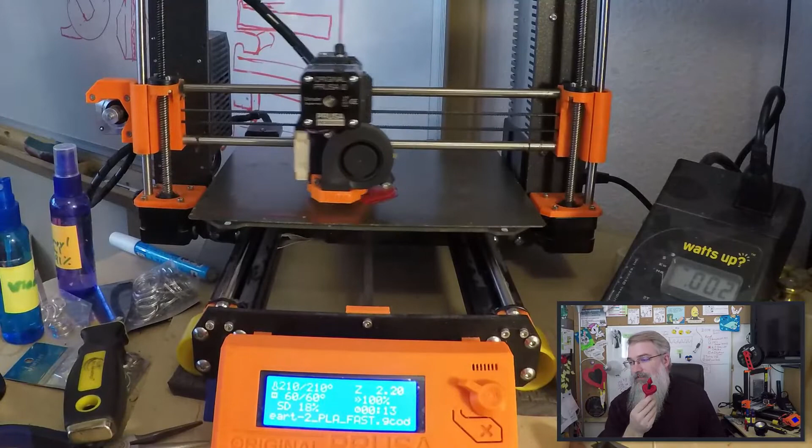But before I go into more details, I'd like to go over the numbers. So here's the numbers for this print. The heart, in this case, took 45 minutes to print, and the arrow took 1 hour and 20 minutes to print, including little stop times, for a total time of 2 hours and 5 minutes.

The heart took 0.007 cents worth of electricity, and the arrow took 0.012 cents worth of electricity, so total electricity is 0.019 cents. The weight of this is 0.012 kilograms, and at $20 per kilogram, that comes out to 24 cents. So this whole thing cost 26 cents to print, pretty cheap, nothing to it.

I don't mention this every video, but when I'm doing my power estimates, I base that on 10 cents per kilowatt hour, which is a good average here, like in Colorado and other places. But if you happen to spend 20 or 30 cents for electricity, it's easy enough to do the conversion, but just to let you know that. Also, electricity is such a minor part of this.

So anyway, it's pretty cool, pretty happy with it. I've had some issues though, so I'm going to go over those issues and explain what I've done. If anyone else is having issues with these, tell me, because I think maybe I need to do some more redesigns to make this better. But let's go to that now and talk about the issues.

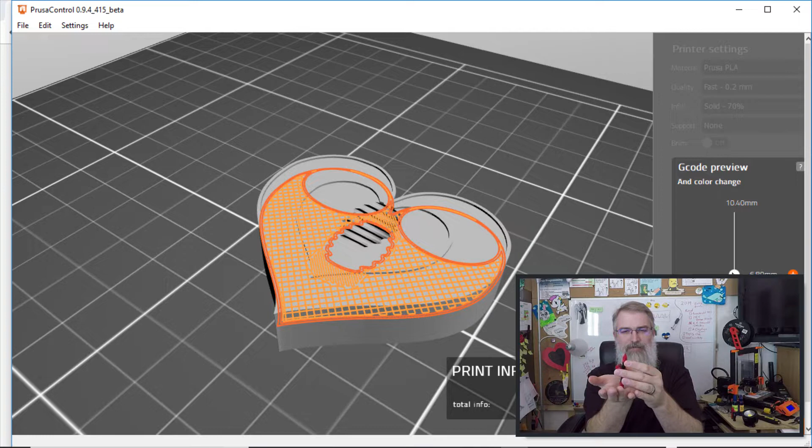One tiny thing before I go on the issues: if you print this out, you might notice there are actually voids in the top of the heart. What I was trying to do with that is balance it. I don't have it actually balanced perfectly, it's still kind of heavy on this side, so that you could, in theory, stand it up straight and not have it fall over. That's why there are these voids in there, which you can see right here in the slicer. So if you're asking what those are, it's trying to balance it.

Oh, and I forgot to do this. So for those, I forgot to put this in the last section. Here I'll put a video of me switching out the gear, but there is an issue with that with the grease, which I'll go over here in a second.

But here, watch this video. Because once it starts beeping, I'll swap it out. So I'm filming the swap out.

Okay, so at this point, I'll hit that to make it stop beeping. One thing to note is when you place this on your bed, place it far enough back so that you're not going to have any problem with this bar.

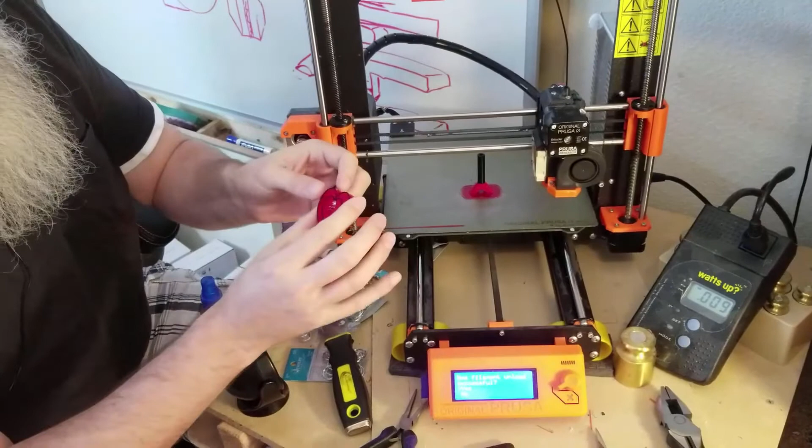So here I put a little tiny bit of white lightning grease in there. You don't have to, but I do. Then carefully try to get this on without breaking it off. Shouldn't be too much of an issue. Oh, almost got it. Oh, got it. I'm just holding the bottom down here so I don't break it. Go slow, I don't want to break it off.

And you got to make sure to get down far enough that the top of the heart is not going to hit the nozzle either.

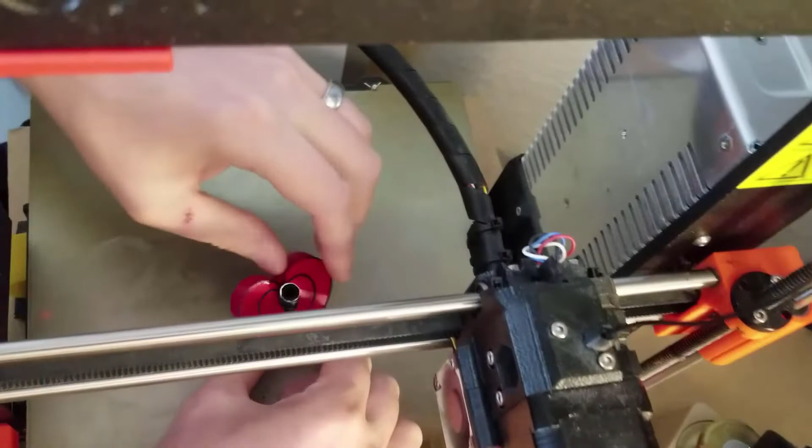Boom, there we go. So now I'll put this black back in because I still need to finish up some black.

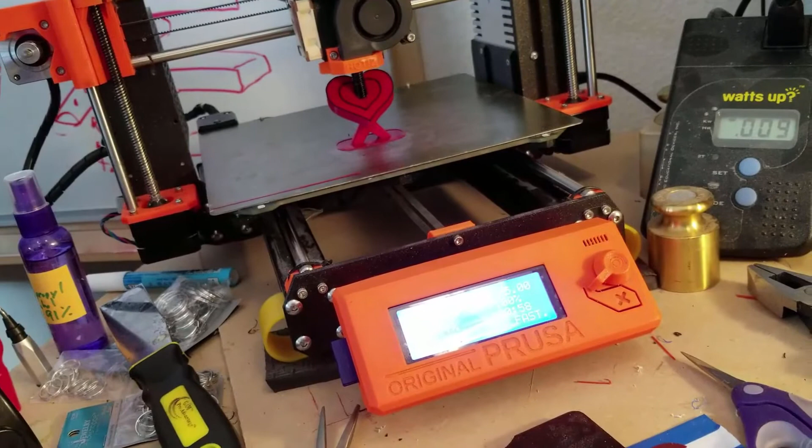Check that height there, looks good. Yep. And hopefully it'll start printing. Cool, more than high enough. So I got one more switch point here in a little bit, and then I'll go red for the tip of the arrow, and it'll be done.

Okay, so hopefully I pointed out the one thing that I think you should not do, it's obviously wrong: put grease on the gear before you put it on. What I did is I did a couple experiments, three of them here. One, I put heavy grease on there, put it on, wiped it off the top, and made sure there was one section that had some grease on it. I set this aside for this video two days ago, and I haven't touched it.

It's been in a box, and it's been rattling around a little bit as I've moved the box, but I haven't intentionally tried to break it. And it's already broken by itself. My thinking was I was going to try to snap it in this video, but it has already snapped. So don't put grease on beforehand.

I don't think the grease even affects the PLA, but I think what happened is I put the grease on there, it got on the top, and so as it tried to put new plastic down, the grease was in the way. It couldn't get good adhesion because of the grease. So don't do that. If you're going to grease it up, which I think is a good idea, grease it up after the fact. I don't think grease has any interaction with PLA, but definitely it doesn't adhere, so it broke.

And I got a couple other ones that I was breaking last week. Now I have two more experiments that I did. Let me make sure I keep them separate. And I have to apologize to somebody who was actually trying to print this, based on my own stuff. Let me get his name. Gene458, who tried to print this out.

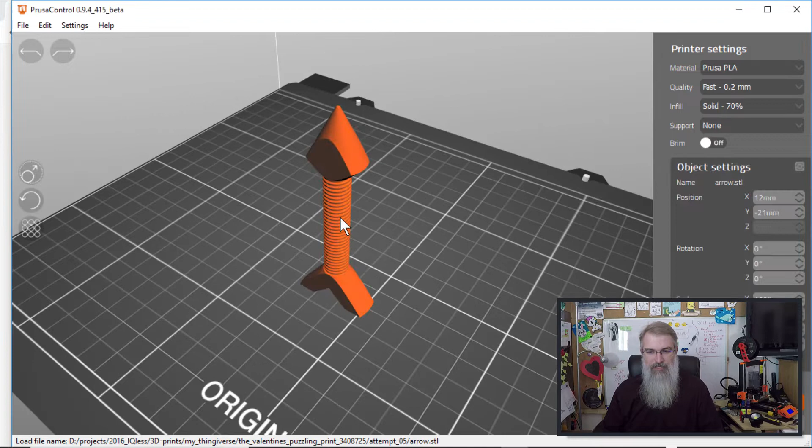So this is the one that has a cylinder in the cylinder. If I generate this at 20%, you get up here, and what it does is there's that empty cylinder in the middle, so you're almost getting a solid piece there. That was my goal, I kind of fooled it into doing the right thing, and that's what this one is.

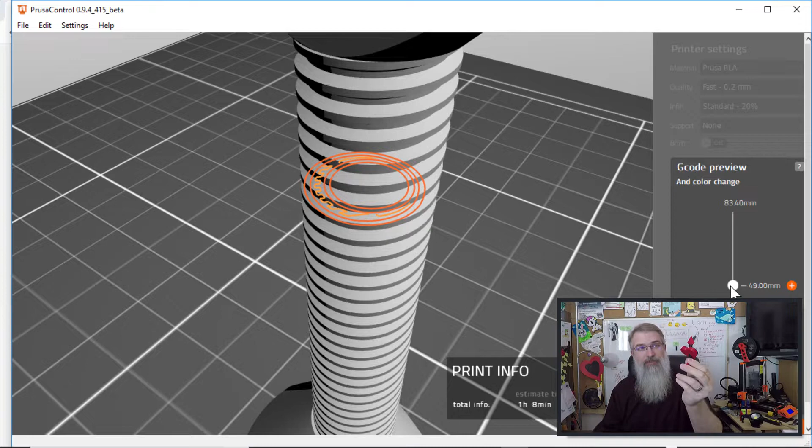And this one, I have no grease on it at all, and I have this, which I think should make it stronger than otherwise, but I wonder if I can - some people are having problems with this breaking. Let me see if I can... okay, I'm not having problems with it breaking. Oh, okay. But again, everyone has different printers and different slicers.

So I'm Prusa exclusively right now, and I probably say that because they do a good job, and I'm exclusively using the Prusa control with no special settings. I mean, if I forced it, I could probably break it, but it feels fine. But they were having problems caused by this somehow.

So I apologize, I should have put up a solid one too. So I did put up a solid one. In here there's two different arrows: one that has this shell in the middle and this empty space, and one that is just solid, so you can adjust it yourself. And this one is, oh yeah, that's stronger.

I printed this one out at 70% infill. Oh yeah, I think they're both fine. Which I probably would have done. I think the problem is the grease. So I think this at a 20% infill with the empty void works just fine, or if you can do the solid one, 70% infill to get it nice and strong.

Yeah, all right, I think that's the way to go. Okay, so that was the problem I had, and I was wondering if I was going to be able to break one here on camera. And I'm not, they both feel fine.

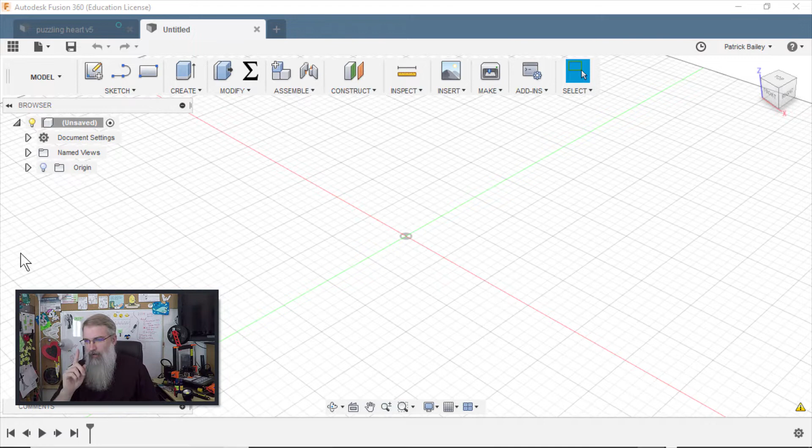Okay, so let me go over what I did roughly to get this arrow and heart working. One thing I like to show every so often is in Fusion 360, if you haven't done this already and you're doing 3D printing, you want to change your preferences so your Z-axis is up, I believe. Now that I said that, I'm going to be wrong. Yeah, Z-axis up, which is not the default, but if you set that as the default, then you don't have to change the orientation when you make your STL file.

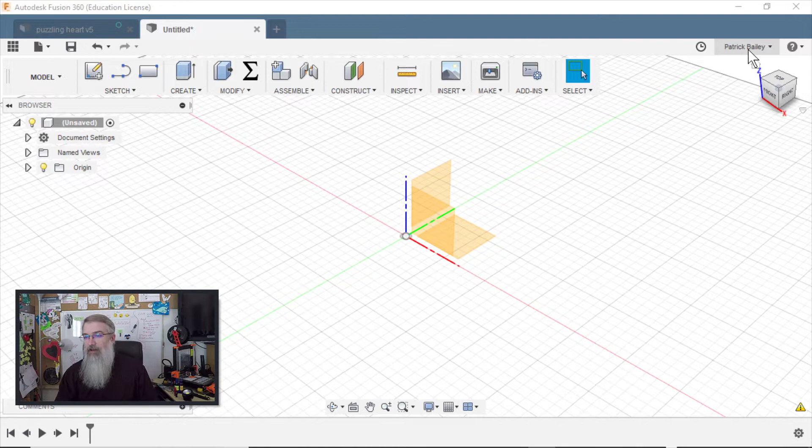To change that, you go up here to your name, go to Preferences, and go to Default Modeling Orientation, Z up, that's what you want. You select that, you hit OK. You may have to restart Fusion 360 to have that applied, but I don't think you do. It's been a while since I've done it. But anyway, let's get started.

So I'll right-click on here and say New Component, and we'll do the arrow. Not that there's anything really all that special about this - well, I recently did a video on the puzzling print, and if you watch that video on how I made the bolt, this is going to be pretty similar. But there's a few things I figured out on how to make the arrow part, the fletching - is that the right word? Which may be interesting or may not. Come up with your own idea.

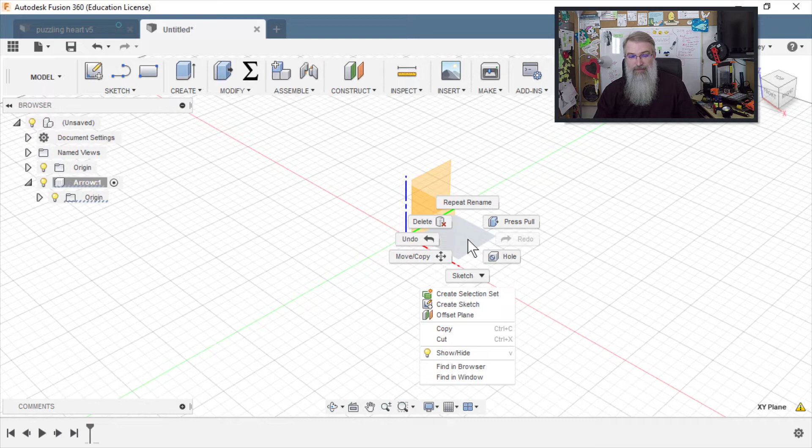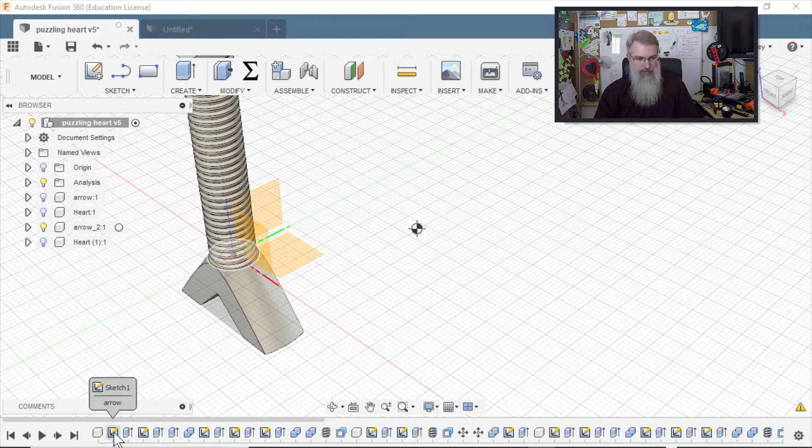So here I'm going to, let's see, right-click on this. What do I want to do? So I'll right-click on this and say create a sketch. Hit S, and I'll make, I think, 10 millimeters. What did I do for this guy, 10 millimeters? I think I did 10 millimeters, let me go check. Let's see, let me go check my sketch. Yeah, 10 millimeters, so do 10 millimeters, and that's going to be our shaft.

I'll hit Q for press pull, and I'll pull it up. Yeah, I'll just make it 40 millimeters for now, and so we'll just leave that as our shaft. Then from here we'll build the base and the bottom. So here, let's see, what did I do? It's been a while.

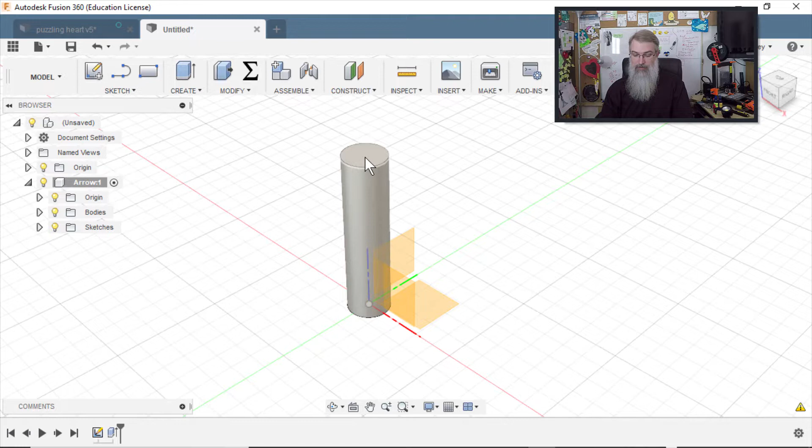I went out and I sliced it, didn't I? Yeah, what did I do? It's been a while. The nice thing in here is you can see your history, so if I go back in my history... oh, history marker here, there we go.

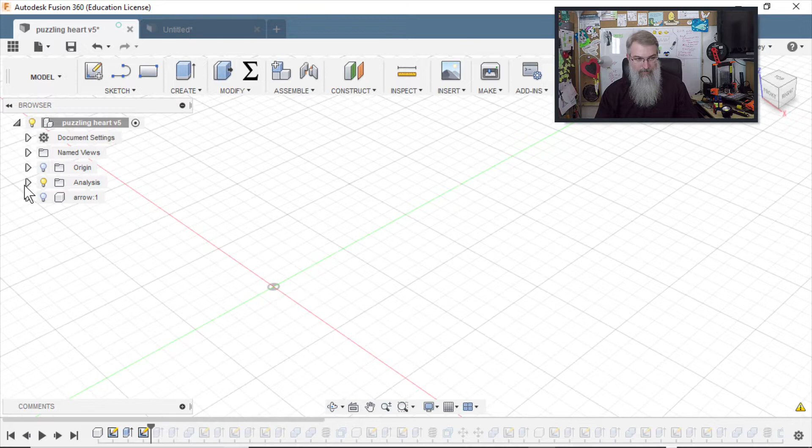There's my shaft. There we go. Lower guy, there's what I did. So I'll do the lower one first. I did a square and did that.

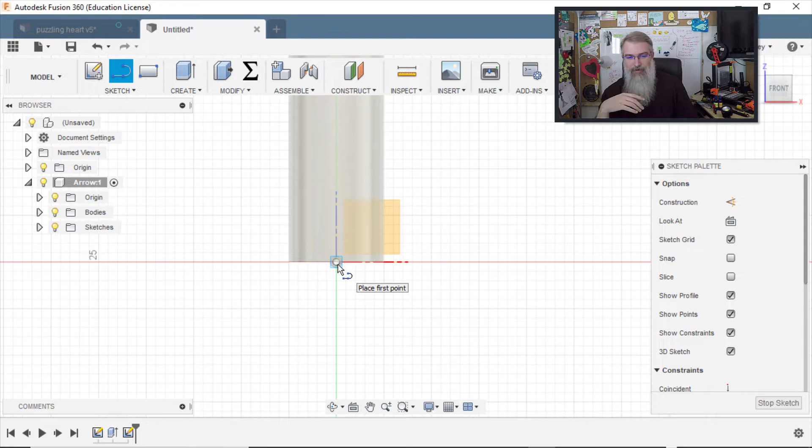So to get the bottom part, right click on here, create a sketch. And I'll make the... hopefully I'm not using the wrong word, I think it's fletching. I'll hit L for my line key, and I'll start here. I know this bottom is 10 millimeters in diameter, so I'll click here and go out straight, go 5.

Oh sorry, oops, I did something. There we go. L for the line key, go out 5, hit enter. L key, go the other way, 5, hit enter. And I'll make a rough base shape, like that.

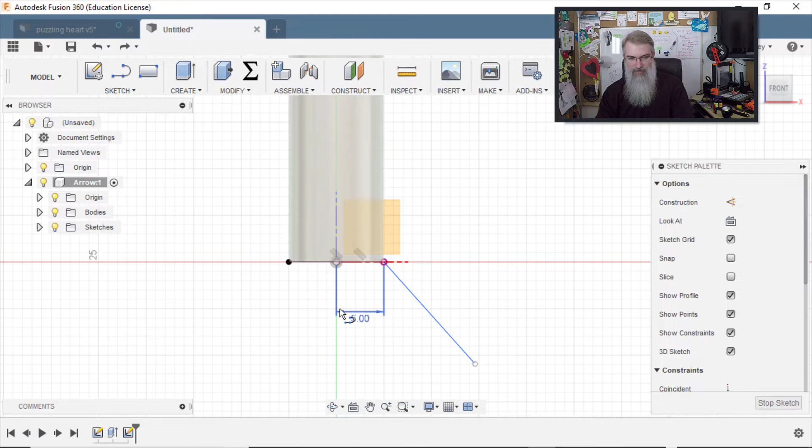I think I was doing 45 degrees, but let me do 45 degrees again. So I'll come down here, hit tab, type in 45 degrees, which forces that 45 degree angle, and then I'll go right there. And I'll hit the line key.

I'll just go straight across, hit escape, and I'll make this a construction line so I can use it later. Hit L, click here, and then go to my tab. And so I can actually do math here because I know this should be 90 plus 45. I can say 90 plus 45 degrees, hit tab, and then go down here, touch, there we go, bam.

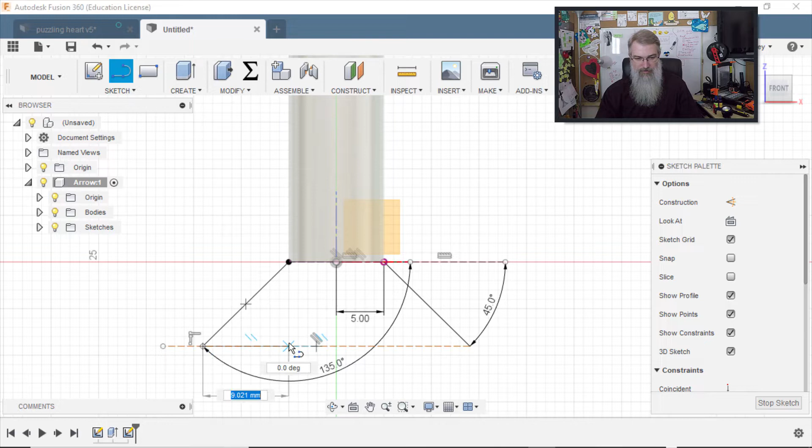And then come under here, let me see, we'll go 6. And I should probably do more than 6, that's not good. Wait, we'll do 9, and then we'll do 45 degrees again to the center.

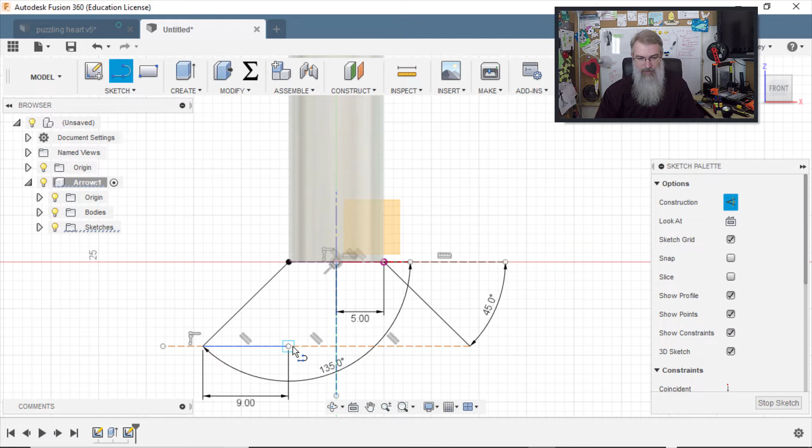Oh, I should put a construction line in there. Hit L, go down, escape, construction line, there we go. 45 degrees.

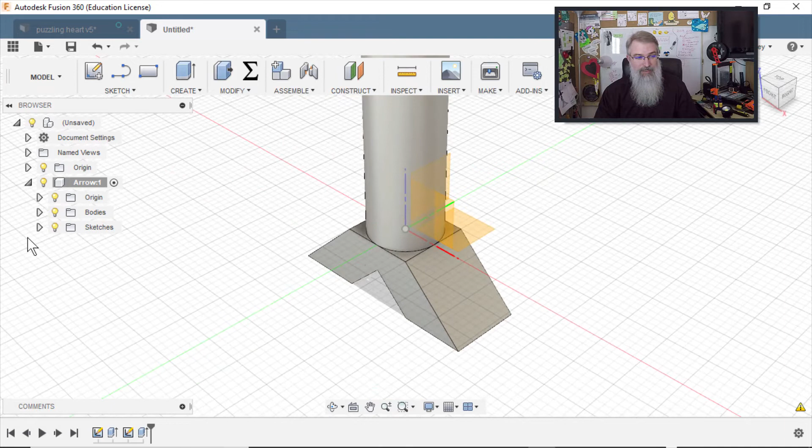And then what I can do is I got this little conic shape to make it a little bit less goofy, and I think I had to fiddle with this a bit. So I can say remove those bodies, add the sketches back, select that one, hit Q for my press pull tool, and pull it down.

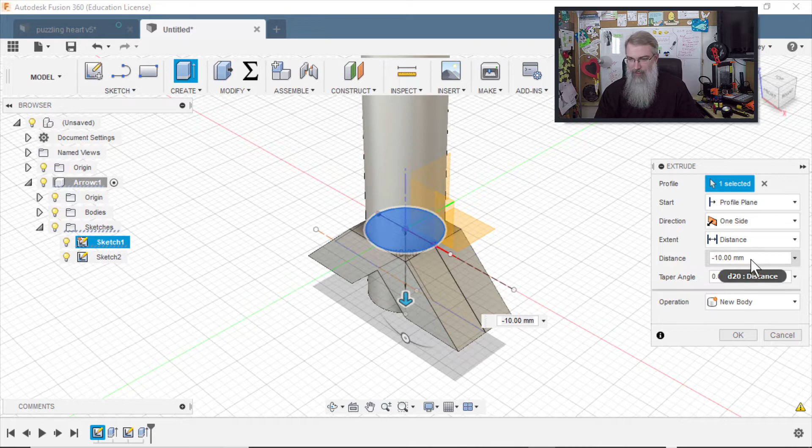Let me bring the bodies back so I can see it. We'll say new body, make sure it's a new body for what this little technique. And I want it to taper out. So I'll say, I think I adjusted this a little bit, 46. I think I adjusted it to kind of try to get close to the edges there. That'll work well enough for today.

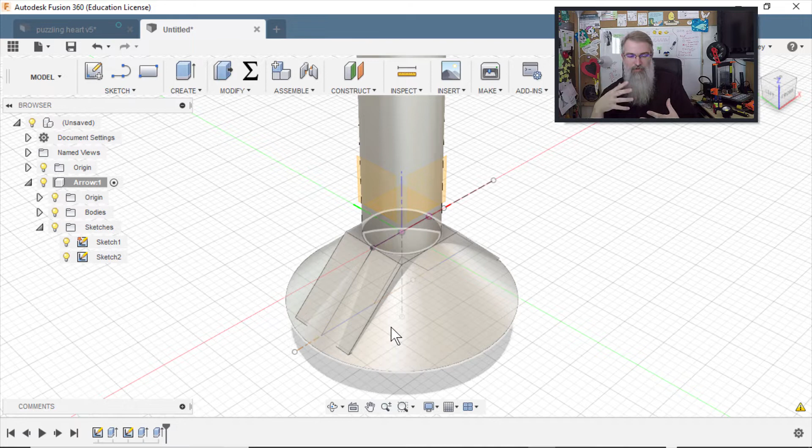Hit OK. And so now I can do some mathematical properties, some joining, subtraction of these two different objects. So I can go to, I think it's modify combine, which might sound funny when you say combine, because combine you can also subtract. There's the mathematical concept of tweaking them.

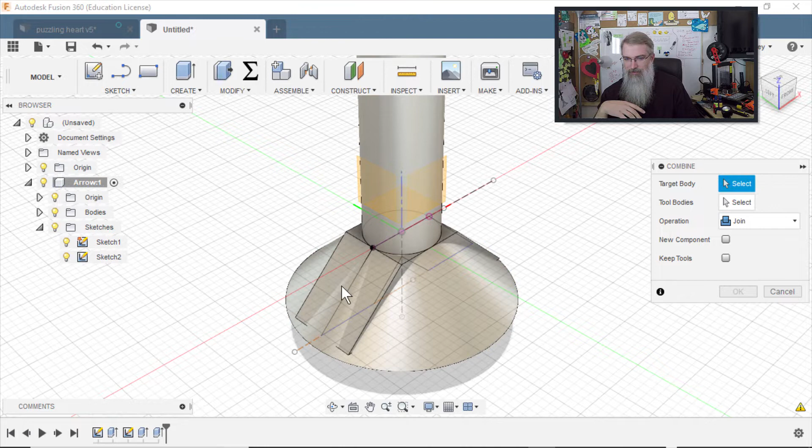So we select, let me start this over again. Select one of the bodies, select that one, and this one we'll select that guy. When I made that bottom one, I shouldn't have joined it. I think it's joined, let me double check on that. But I think this will still technically work, I think.

And so now I want to do an intersect. Yeah, okay, that's the problem. That's why I wanted that one to be separate, because now that I'm intersecting them, it's going to wipe out that shaft, but I can remake it here. So hit OK. And you can see it's not quite perfect what I did, but that was the idea. I tweaked it a bunch to kind of get it smooth.

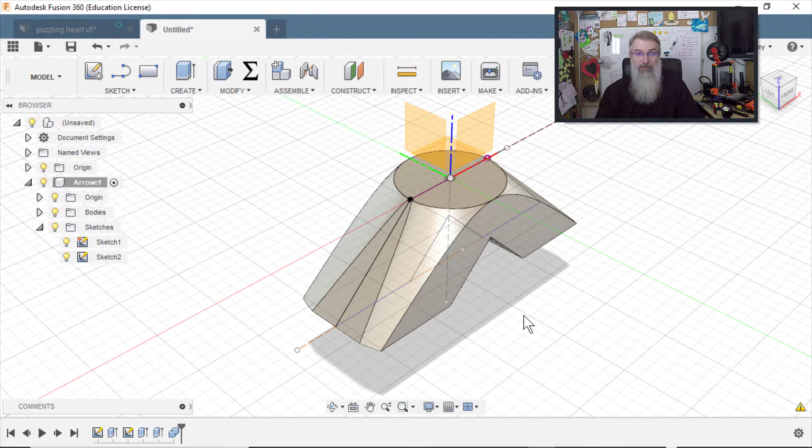You may have to fiddle with those angles. But let me come back here, press pull tool again. And say, what was it, 50? Boom, something like that. Now what did I do on the top? I did out and in. Let me see what I did.

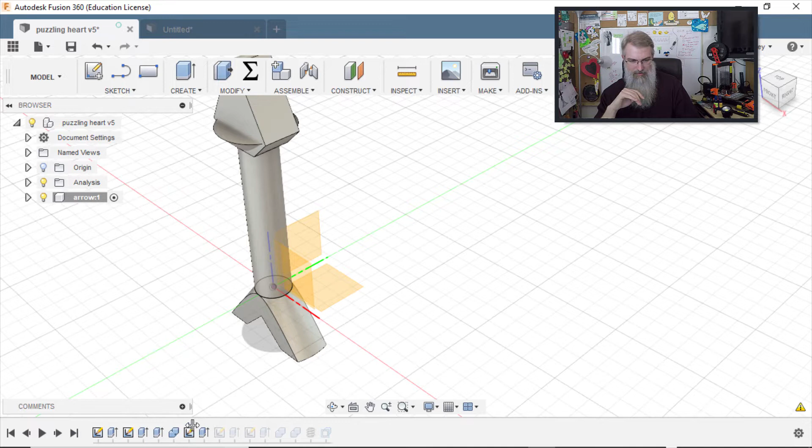There we go. Out. And then back in. And I did that. That's what I did.

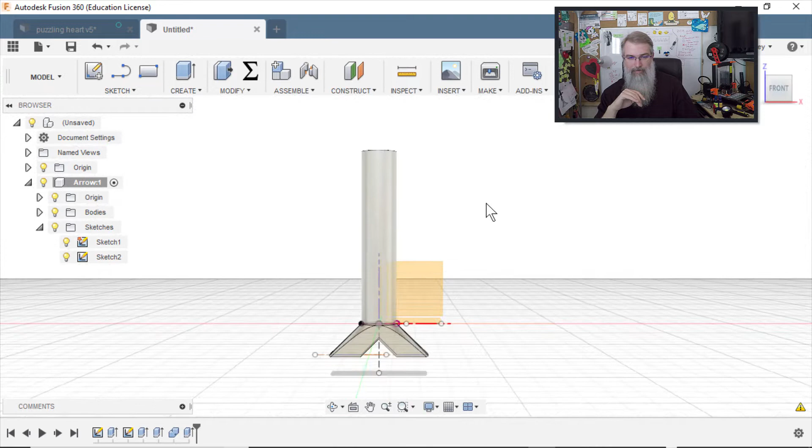Okay, so what I did here on the top is I clicked on here, pressed Q for my press pull tool. Oh no, if you do this and pull it, it's just going to extend your shaft and keep it the same object. I don't want that.

So I'll click on this and say create a sketch, and select that same spot, press Q, and so now it separates them.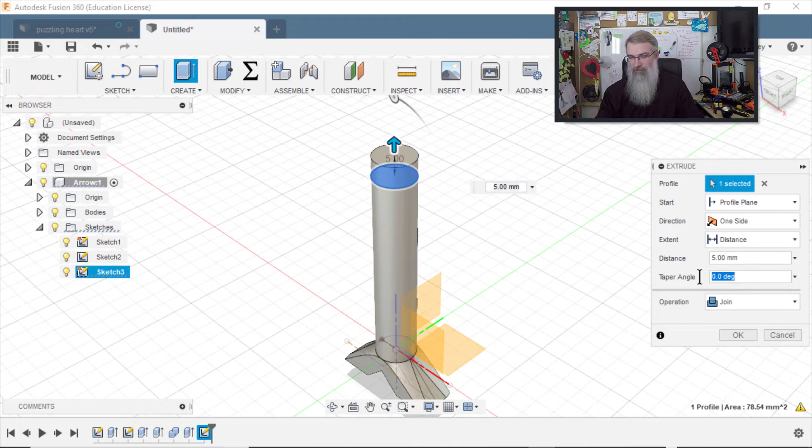And at this point, I want to taper out, and I can taper out at 45 degrees. I'll say, I forget what I did, I'll just say 5 millimeters for now.

I'll click on this, say create a sketch here, do press pull on this as well, and make this, but I want to taper it in, and I forget what I did, but it wasn't 45 degrees because I don't have to. We'll just say that, and I'll go as high as I can until I get a point. Hit OK, and so now I have that.

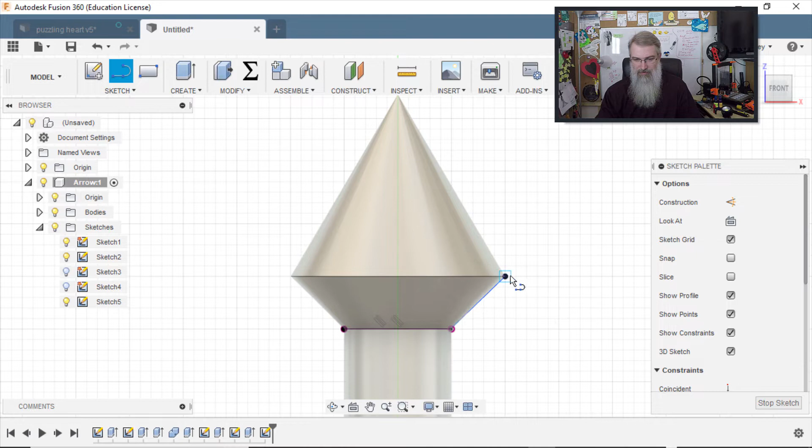So then what I did is click here and say create a sketch on here, and I'll make some lines. Line, line, line, and here I didn't want a tight point up here, so I got it.

Oh no, now I went to the top. Go to the top. And you can fix it after the fact.

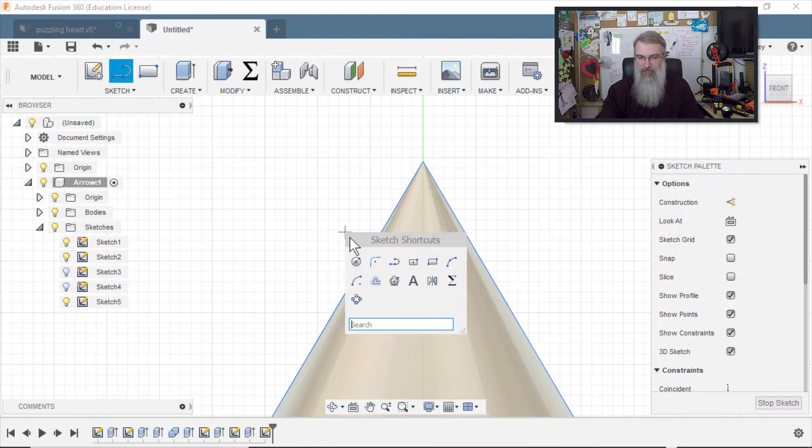So there's that shape. But I don't want a pointy edge, so I will put a little arc in there, because who wants to poke themselves in the face?

Boom. Okay, then I'll get rid of the bodies for a second. I've got escape. Do the bodies for a second. Click on this. Press Q for the press pull tool.

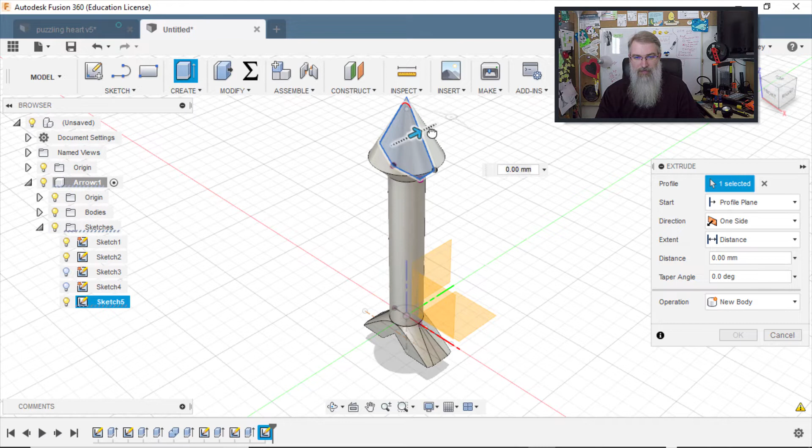Bring the bodies back, and again I'll do symmetry, 5 millimeters, and new body. So I have that, and now I can subtract these. So we've got 3 bodies.

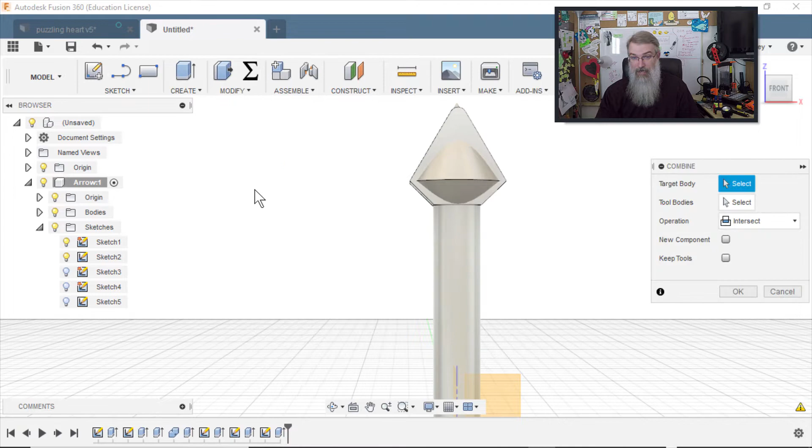So what I first want to do is say create, modify, combine. No, not that guy. Not those guys. Are you going to combine those two?

Okay, I just got the same problem I did again. Those weren't new bodies that were separate, were they? I have to recreate the shaft yet again. But there, I wanted to intersect those two. If I recall correctly, I think I originally created those as 2 bodies, and I had to combine them, and then I had to do this intersection.

So there is kind of roughly what I did, but now I got to bring back my shaft again, don't I? Oh, and it wiped out the bottom. Never mind, let's not do that. Let me go back in my history.

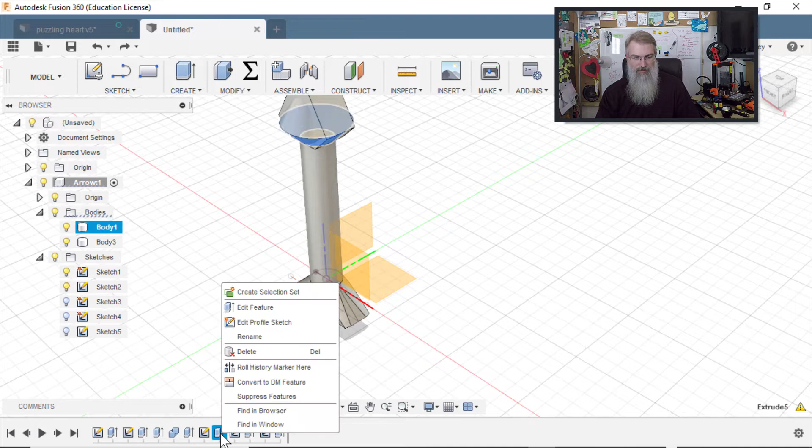Edit that feature. See, join, not a join. New body. I want it to be separate. And this one, edit feature, not a join, new body. There we go. And then this one,

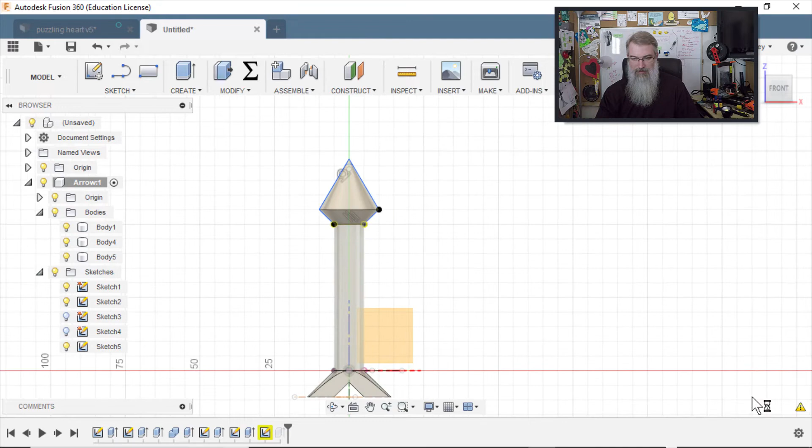and now it's being persnickety at me, but I think it's okay. Okay, now they're new bodies. I think that'll work. Combine that one

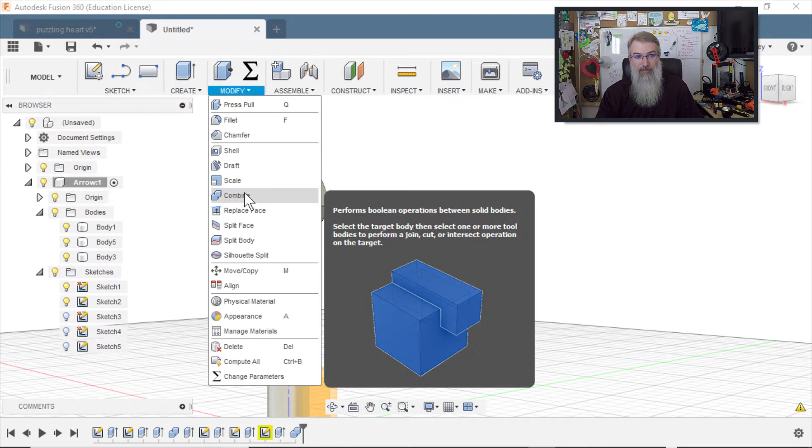and no, we want to join them. So join those 2 together, and then combine that one and intersect. There we go.

Now, of course, you'd want to probably tweak that a little bit to get the right fit. That's not exactly looking like what I did, but that was the idea.

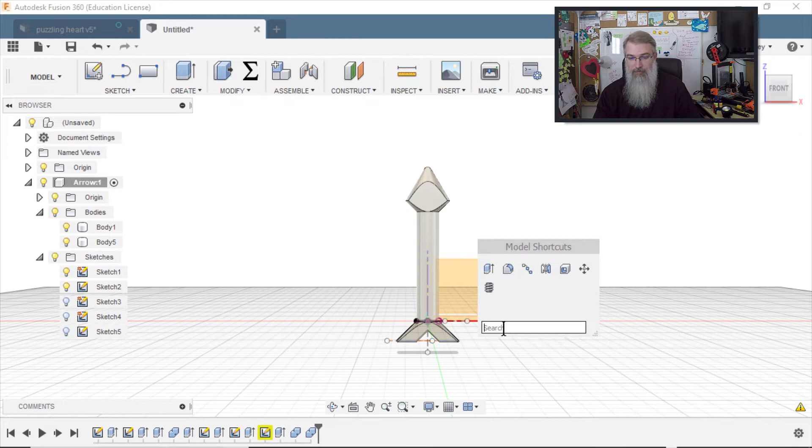And then lastly, all you got to do is put the gears on, put the threads on. So there's a thread tool. You can search for it, open up this tool and search for thread. I happen to be using it a lot, so I have it in my shortcuts.

And then we will select that shaft. Select modeled, because right now it's just a picture. And it will model for us, and it tries to attempt to figure out what you want. So it does an M10 by 1.5, which is good. We just want to make sure that we make the other one use M10 1.5 as well.

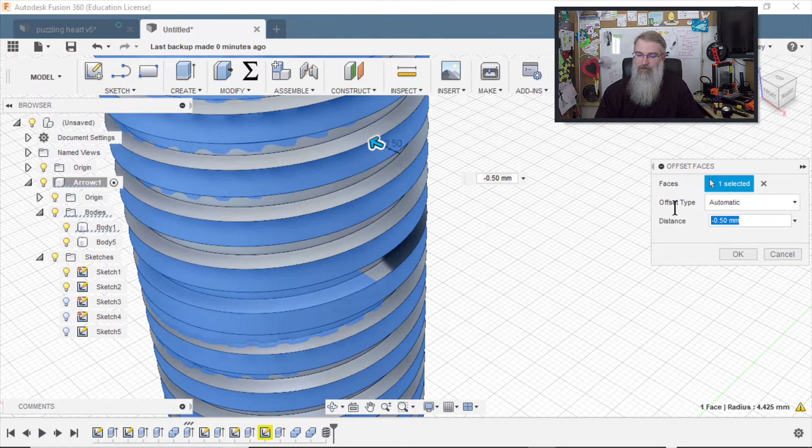So hit OK. And the last thing I do is hit Q for the press pull. Well, sorry, don't hit Q. Go in here, select the screw, select that plane right there, press Q, and I go in, not 0.5, I go in negative, I guess I'll type it, negative 0.2. And that makes a little looser fit.

Did you do negative 0.2? Yeah, negative 0.2. That makes the thread a little bit easier to thread on, otherwise it's too tight for what I'm doing. Your mileage may vary.

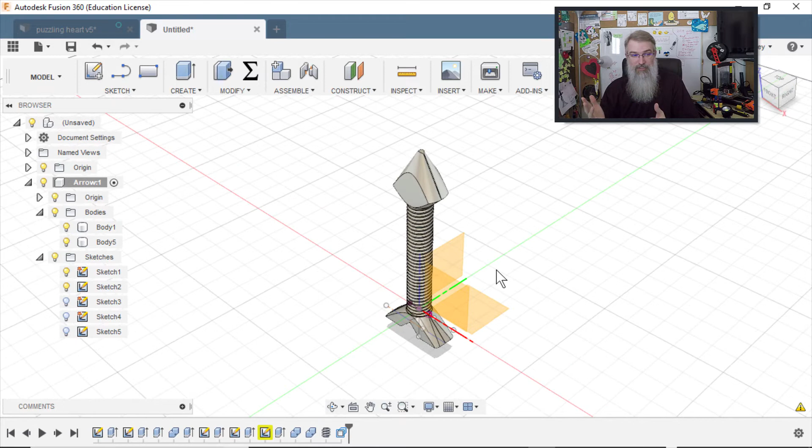So there's the arrow. This section's been going long, so let me cut it out here so I can edit the next part. So the next part, let me go over making the heart, the nut for this.

Okay, now that we have that, let's make the heart. So I'll right click on this and say new component, and I'll call this the heart. And I'll get rid of that arrow so I don't have to see it.

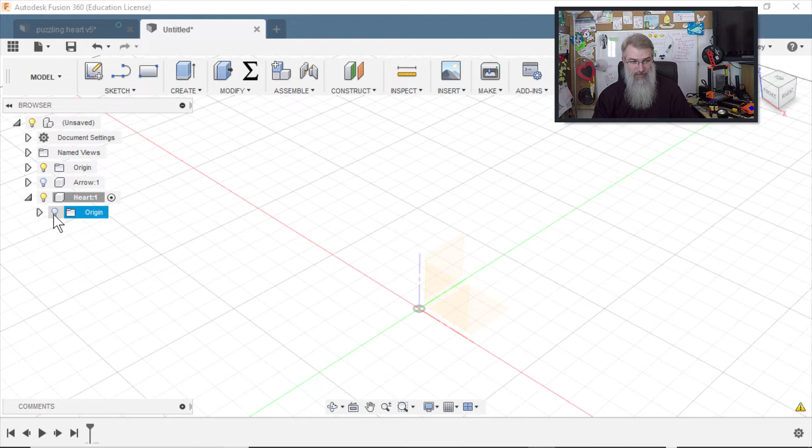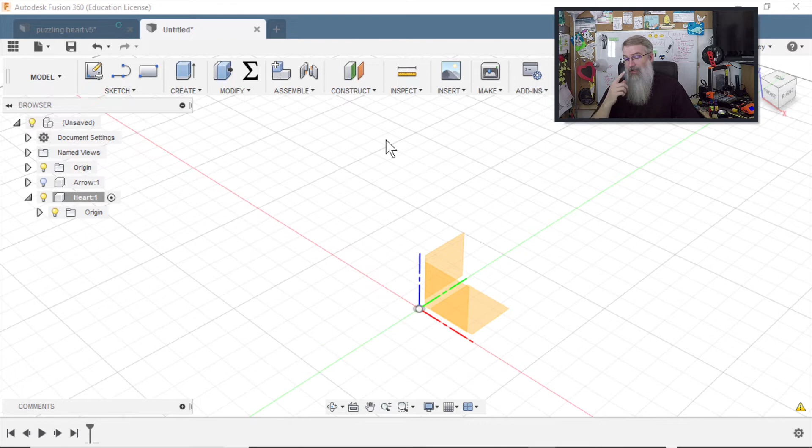Now, originally what I thought I was going to do was make the heart, make a shaft, apply a thread to it, and then move that shaft over and kind of cut through the heart, and then modify those both objects using the combine. I thought that would work, but it was such a complex shape that it didn't like me. So let me see what I can do here. Let me see if I can get that to fail again, and then go through the method I use.

So here I'll create a sketch, and I will insert an SVG. I happen to go find a heart SVG. It's made my life a little simpler than trying to draw a heart.

Okay, where are you? 3D prints. So there it is. There's a heart I found.

Oh, I'm going to make this too big, aren't I? Before I put in there, I kind of want to make a rough sketch so I get the right size. Let me get a rectangle and make it 50 by 50. I think that's roughly what I did.

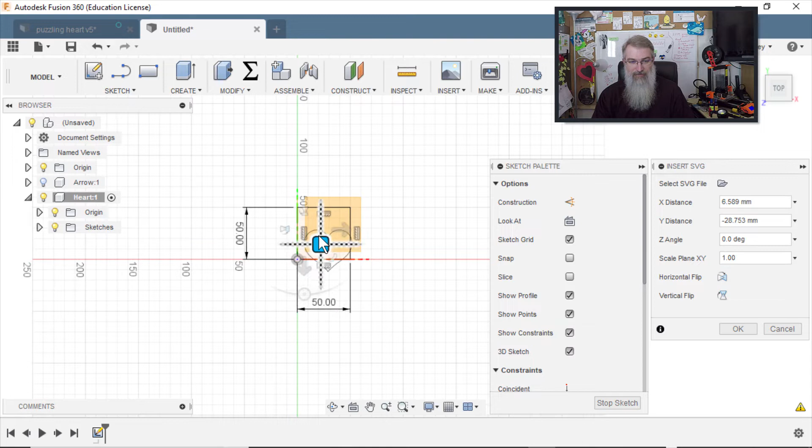Now we insert an SVG. There we go. So now I can kind of resize it to make sure it fits in there in the dimensions I want. I'm going to wipe out this rectangle in a second, but okay, so that's roughly the size I want. Hit OK. And then I can get rid of these lines because I don't need them anymore.

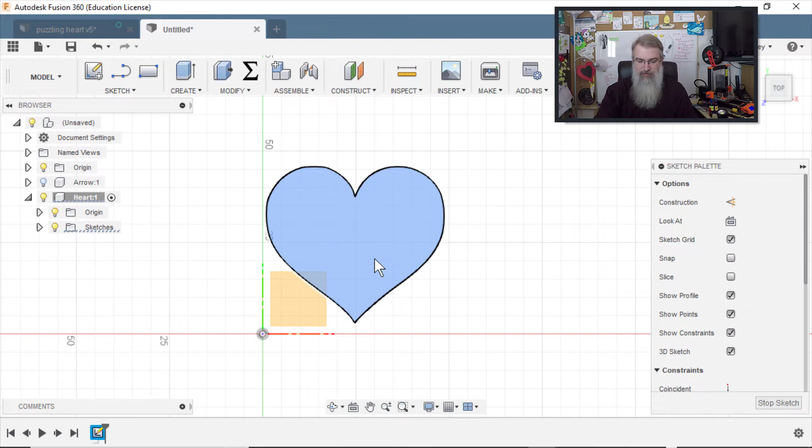And then I can take this and do Q for press pull and pull it up. Let's just pull it up 10 millimeters. And so there's our heart. We just need to put a thread through it.

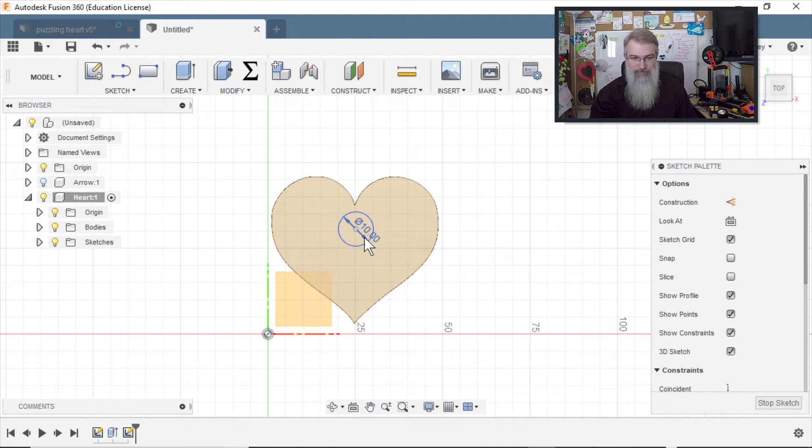So the first idea I had, and I'll go through this like I said, I will create a sketch on here and put in that 10 millimeter circle. And I'll click on this, press Q, and just to overdo it, I'll say new body, symmetric. We'll just make it obnoxious, way too long. You hit OK, it's a new body.

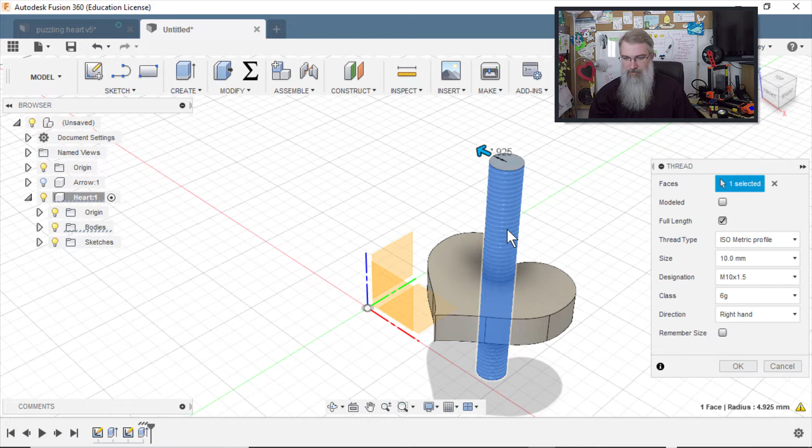Let me apply a thread to it. Modeled, and we'll see that's the right thread, M10 by 1.5. And come down here, press Q, and go in 0.2 and hit OK.

Because I could have just put a hole in there and gone straight, but I want to angle it, right? So what I would do next, or what I attempted to do next, was choose the Move Copy tool, click on this, and change it, 45 degrees.

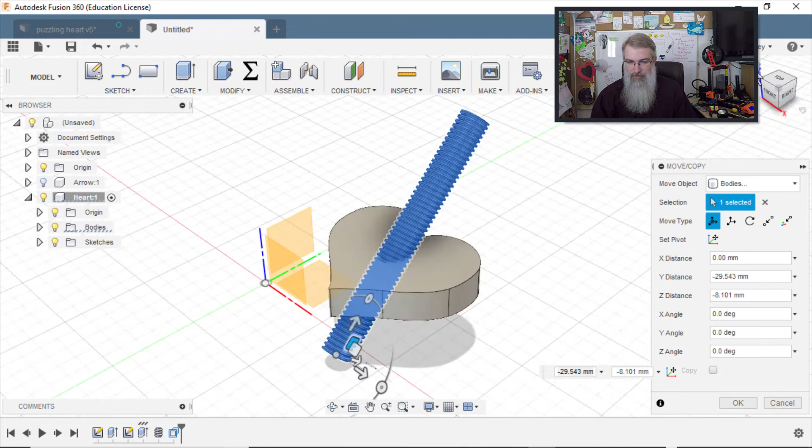And then move it in here. That looks kind of good. So hit OK. And then I will go to Modify and use that Combine tool.

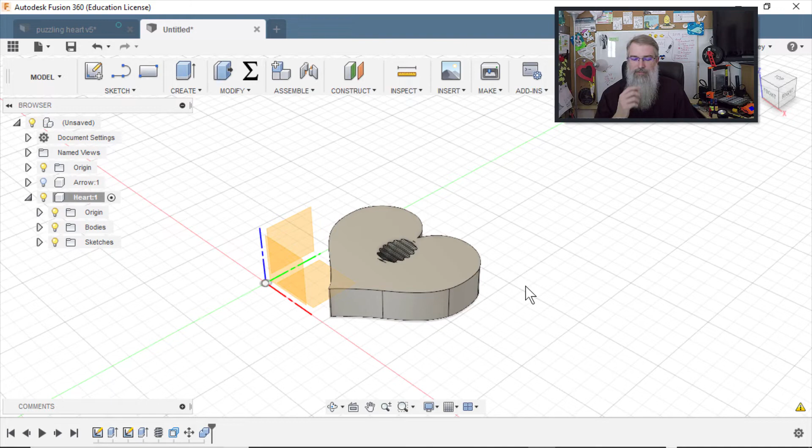Select that, select this one, and then do a cut. I think I've chosen the right way. Yeah, hit OK. And now watch, it likes me. Oh, now you're gonna like me, little turd.

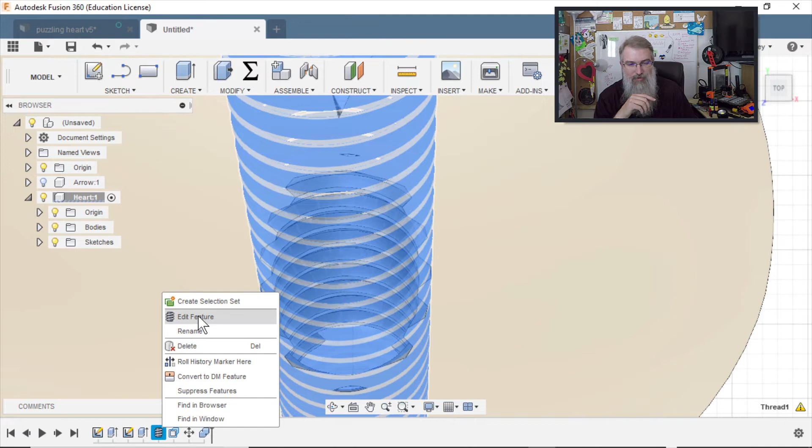Didn't like me today. Well, there you go. And then I'll have to go, oh, I did mess that up. Let me go back a step. That thread, since we're using to cut, we don't want to...

Did I modify it? No, I put the thread on there, I didn't change it. So now I want to go into the thread right now, and I need some more space. Yeah, see, watch, I do a video, it works. Press Q, and go in.

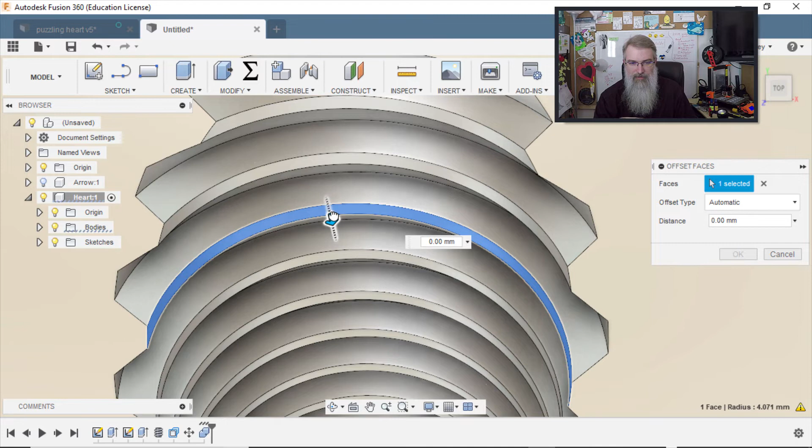Oh, you're not gonna... Let me go back in my history. Did something wrong here. No, that's fine. No, that's good. So now you work, you little turkey.

Yeah, at this point, it's going to be hard to fix that thread. I forgot, what did I do? I think I might have left it as is. It's been a while. This works.

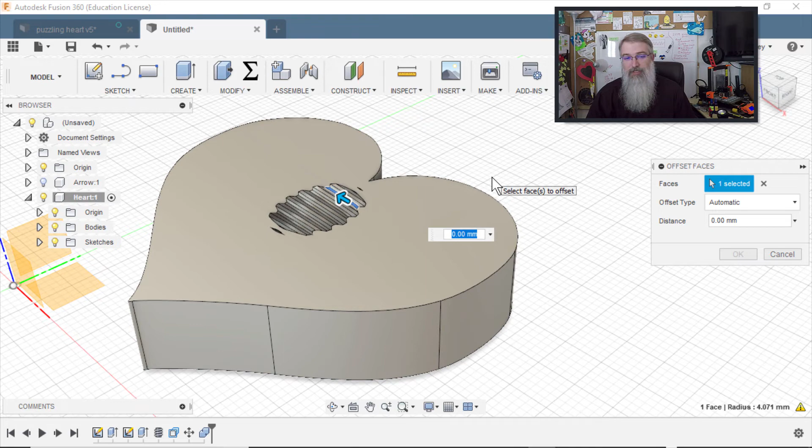Okay, this is a much easier technique. If that works for you, then you've got your cut just fine. For me, when I was trying to do it last time, Fusion 360 kind of balked on it and said it couldn't do it. Let me go through my other history here. There we go.

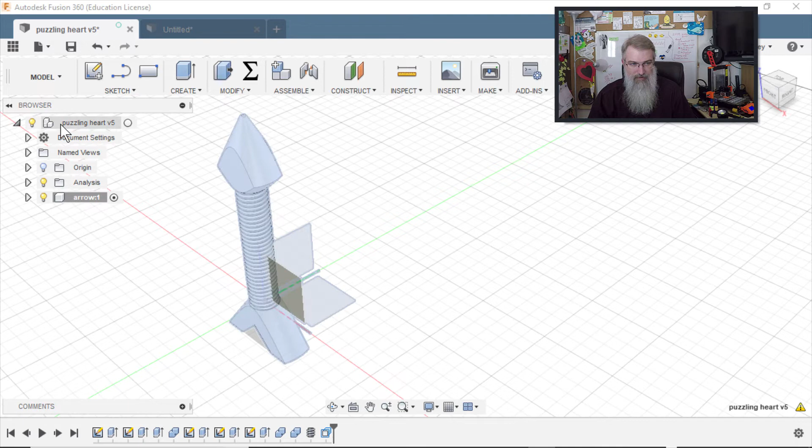There we go. If I can show this. It's probably easier to show than to totally redo it, since that other technique worked. That's a much easier way to do it.

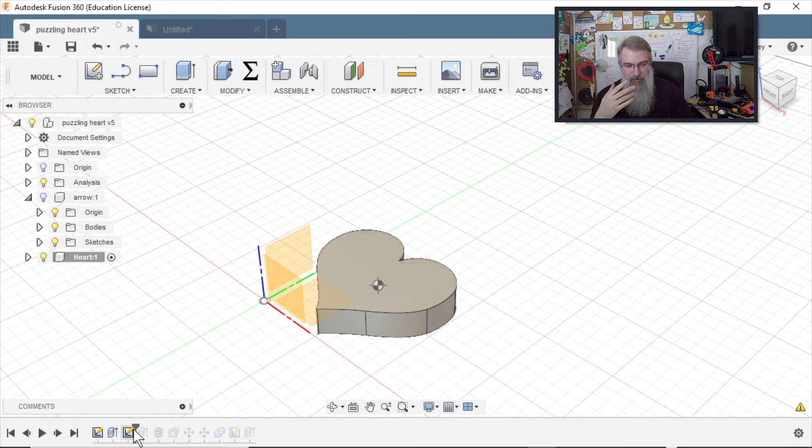So here's my other heart that I did originally for this. What I did, because originally that cut I just did didn't work, is I made a giant cylinder that would engulf the entire heart. I put a shaft through it, put my thread through it, and then I adjusted it by 0.2.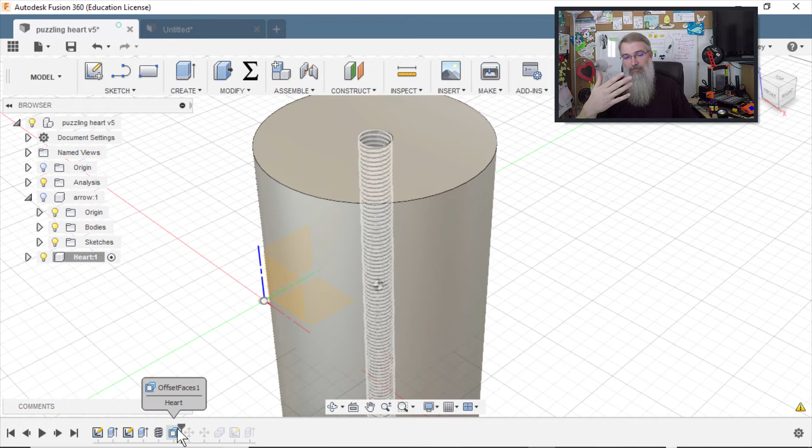Well, maybe this is probably an easier way to adjust it by 0.2. Okay, maybe let me show it because it's probably worthwhile, because there's some problems with this technique. Let me back up, undo what I did here, and show you what I did for my actual one. So maybe my problem was actually a good problem.

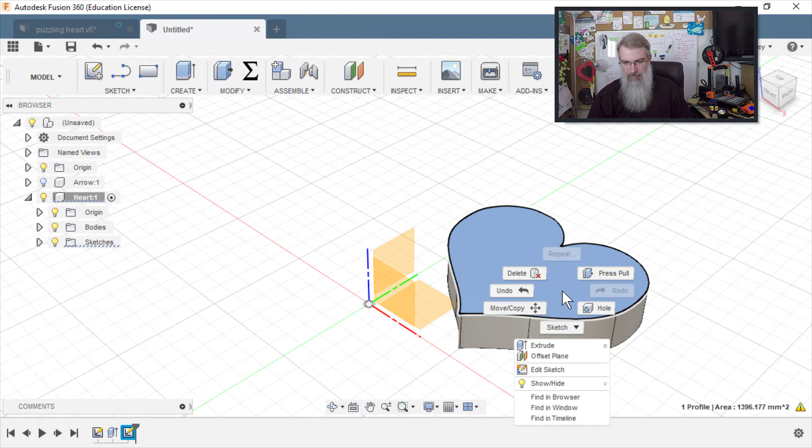Okay, so here I am. I got that 10 millimeter. Now let me undo that 10 millimeter. So what I did is I made, get a top sketch. I will edit this sketch, create a giant cylinder.

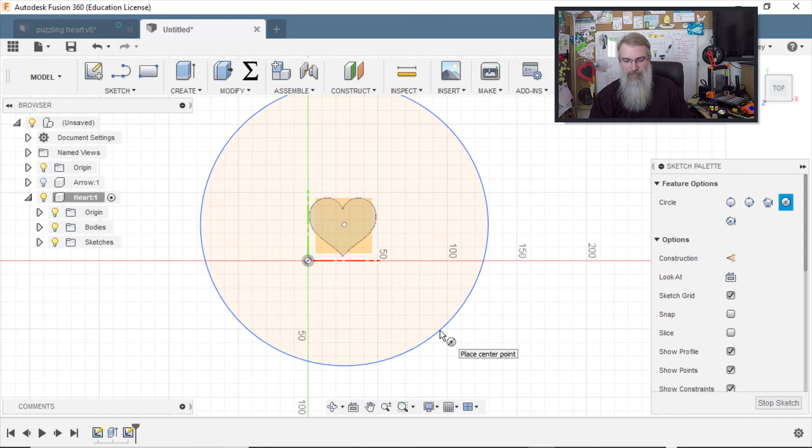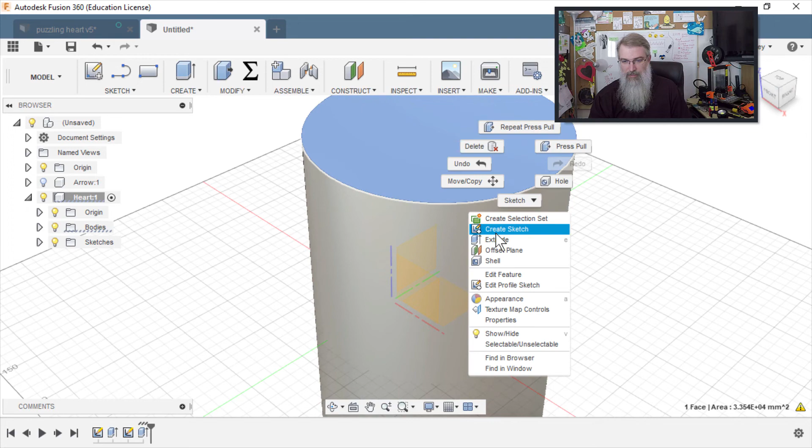Doesn't really matter exactly, it doesn't have to be centered. I'm going to create it rather big by comparison. Just say like that. Press Q for my press pull tool, and we'll make it—oh, don't do that. You've got to select the heart because I want the whole thing. I'll go way up and say symmetric because I need it big, and I'll say new body. Click on here, create a sketch on the top where I'm going to put that.

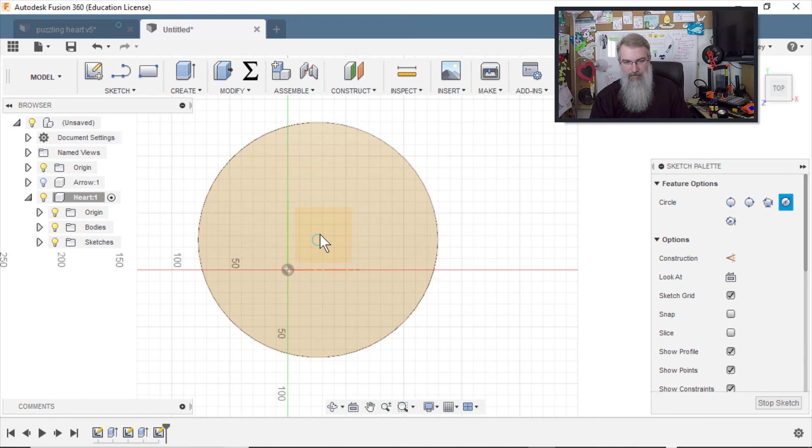Okay, where's my circle tool? You should stay in there. There you go. Go to the center here and go out 10 millimeters. Select that, press Q for my press pull tool, and I'll cut this whole thing in half. I'll say to object, select the bottom face. There you go. So now I've got a hole all the way down.

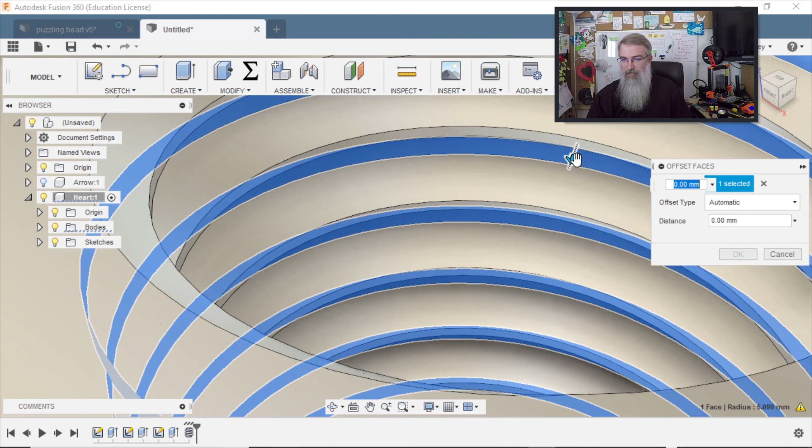And then I will apply the thread to it. Select modeled—it's M10 by 1.5, which is what I want. Hit OK. You go in here, and this is too tight, so I'll select that, press Q, and go in—not -1, -0.2.

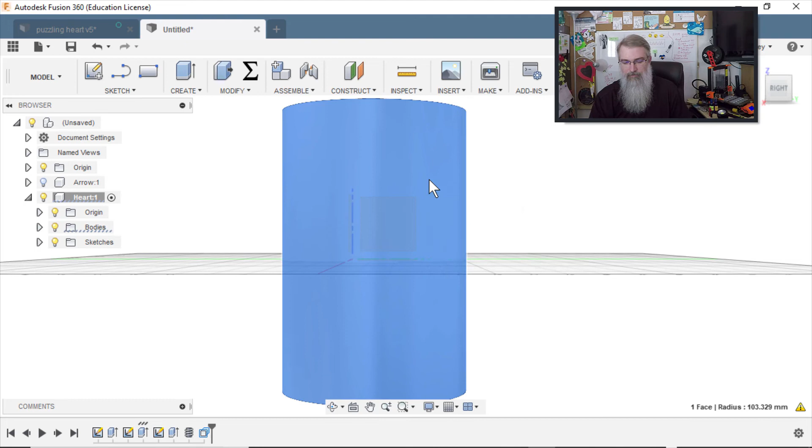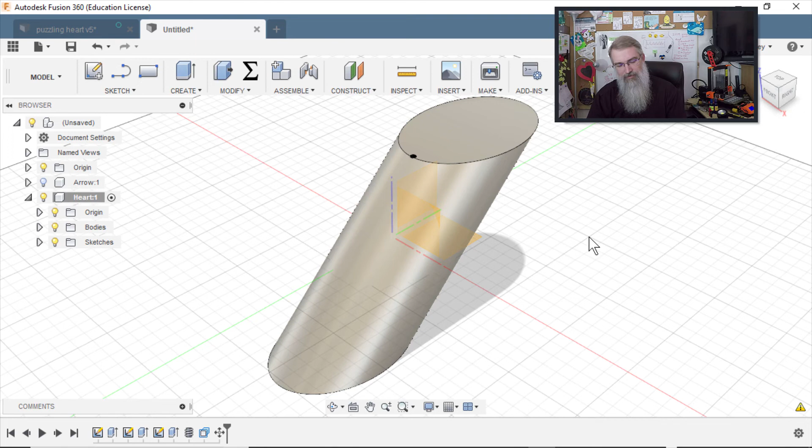Now comes the fun, because I've got to do some adjustments here. I'll select this whole thing, say move, select the move tool. The first thing I do is flip this to 45 degrees, and the idea is I want that to go through my heart at a central location as best I can, so it's going to take some tweaking. Hit OK. Oh, what did you just do there? I lost my centerpiece. You say move, move this guy. Okay, rotate. I'm not sure what I did there—45 degrees.

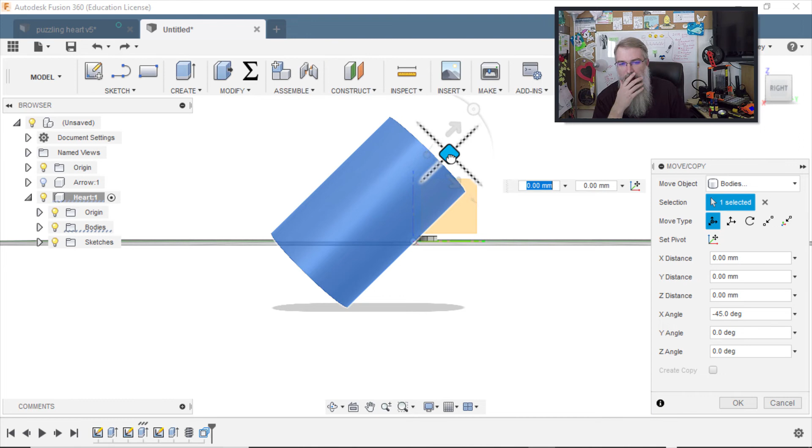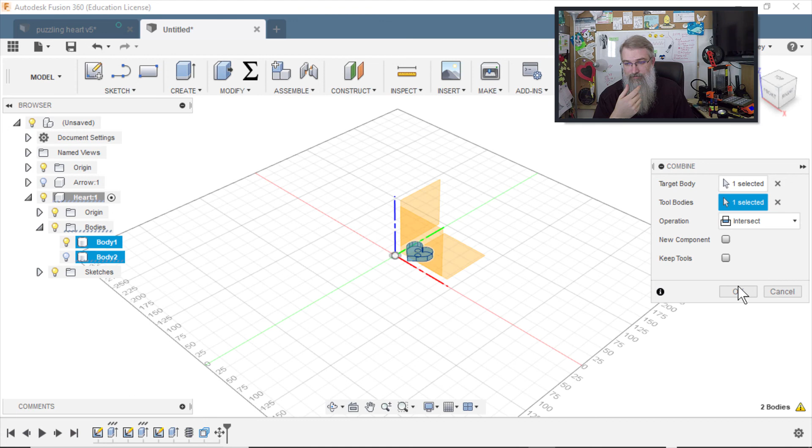This is the slow part because you're moving this giant thing, and you may have to do some tweaking and adjustment because this thing needs to engulf the heart. So I may not do a good job in this test, but hit OK. Give it a second. I'm going to do modify, combine, select that guy, and you can't even see the one, so I may have to turn this off for a second, and then select the heart. Then hit—we don't want to cut, we want to intersect. And hit OK. And I just did a horrible job on that.

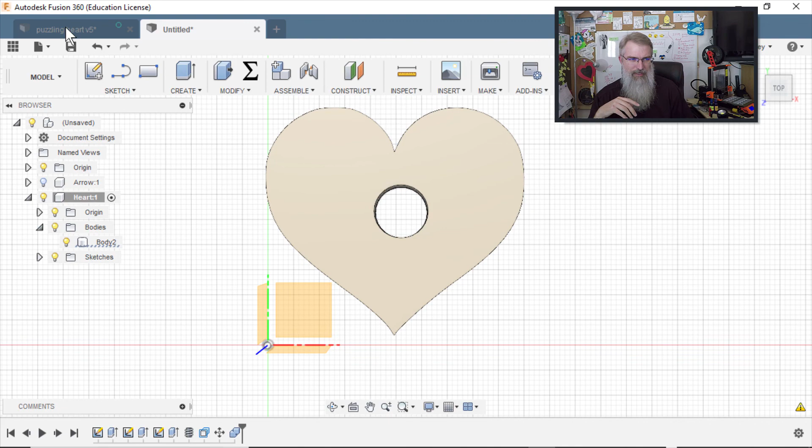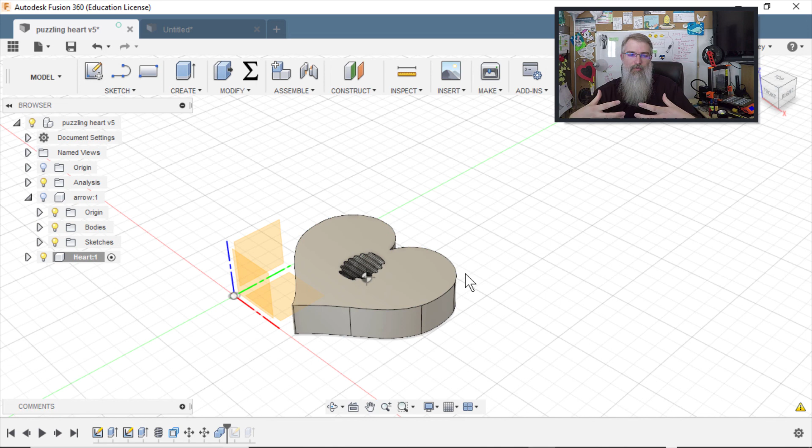So why aren't you showing up correctly? Oh, it didn't—excuse me, it didn't grab my cylinder in the middle. Okay, that seems weird, but you get the idea. There's something I messed up here. But the idea, which I did over here, you'll see here's that guy, his object, with that cut in there. I move it, I angle it, then I combine both of them, and there I get my cut. I'm not sure what I did wrong on this other one, but I don't know why that cylinder wasn't connected. I had to have the whole thing engulf the other one so I could get it done correctly. At the very end, I added those little features. So that's how I got it done. I wish I could show a better demo here, but I'm missing something I did. I'm not sure, but that's the idea.

So anyway, if you like the print, Valentine's Day is coming up, and it's kind of a cool little doodad to give out and show people. It costs about nothing to print. If you like it, download it, print it out. If not, I hope this video helped show you some techniques on how you can make your own. I'm sure there's a lot of other cool things you can stick on a spike, aside from my heart.